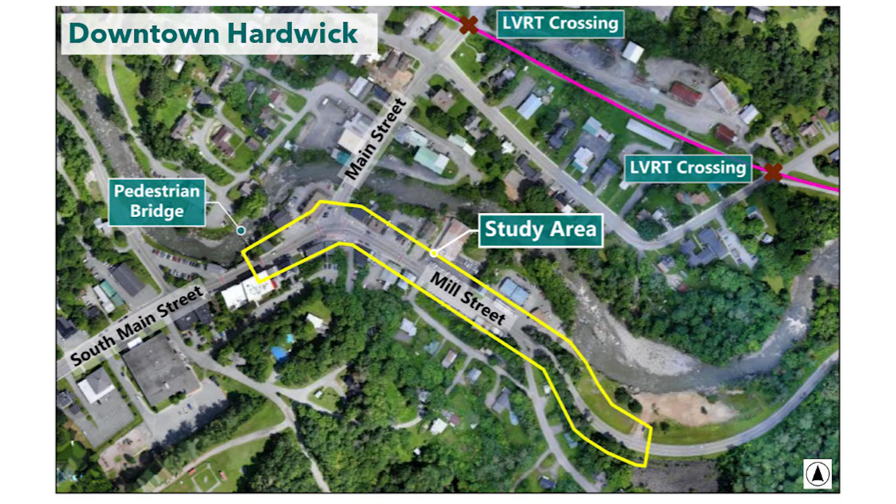Just a little overview here for folks who are maybe new to the project and weren't with us the last time. This is the focal area of the study—at a 30,000 foot level, we're looking at South Main Street and Mill Street, essentially from where the pedestrian bridge connects into the system, all the way over to the town parcel at the gateway into downtown Hardwick to the east on Mill Street.

We did do a site walk the last time we were out here to really assess the existing condition and help us understand things in more detail. We had a lot of data and information collected as part of that existing conditions review, but it was really helpful to ground-truth things. We identified a number of issues, including some disrepair in the sidewalk system as it is today, and when focusing on pedestrians and enhancing their experience along this corridor, we're thinking about making sure folks are comfortable and our sidewalks are accessible.

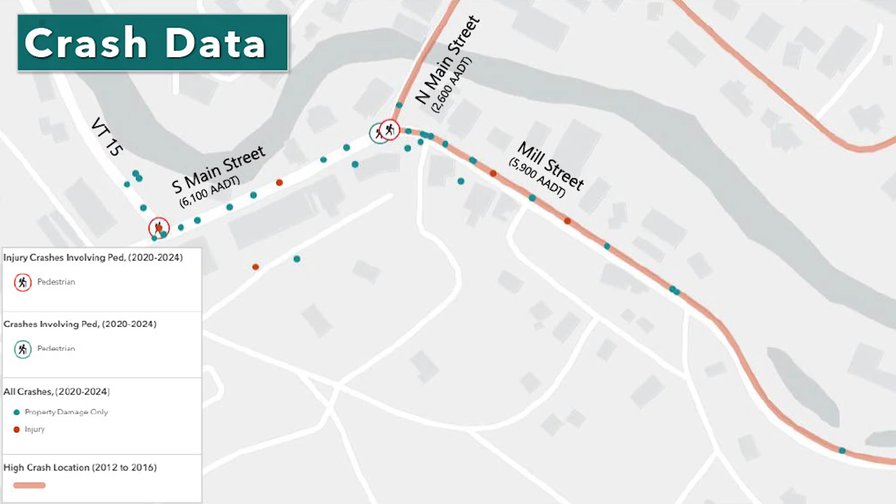Mill Street is considered a high crash location segment, though some of that analysis is a bit outdated, hinged on older crash data. When we dig into the more recent data, you're seeing 2020 to 2024 crashes here, and we do have some locations with pedestrian crashes and vehicular crashes resulting in injury. We're using that information to inform and dig into those crash reports a bit deeper to understand what traffic movements or conflicts we should be paying attention to as we look at alternatives.

All right, so the project purpose and need—this really helps us, especially in the next phase. It's defining what is compelling this work, and helps us justify the funding going forward to do this good work. It's our way of laying that groundwork, and it also lets us evaluate different options on the table for making improvements, making sure we're meeting the need we've identified for the project.

The purpose of the study as we've defined it is to create a safe, comfortable environment in the village core and establish a clear transition to the multimodal core area, improve connectivity of the pedestrian network to support access to community destinations, including businesses and recreational resources, and improve multimodal transportation connectivity and infrastructure.

Some of the needs compelling this study highlight deficiencies going forward: a lack of an effective transition zone from high-speed rural highway to village center, a non-continuous pedestrian network, and insufficient capacity to handle increased multimodal activity, particularly from the LVRT but also other recreational uses.

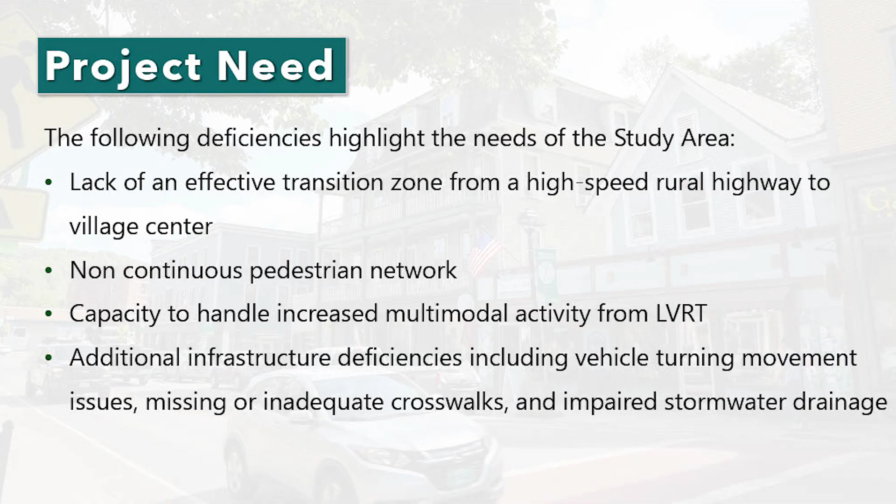Additional infrastructure deficiencies include vehicle turning movement issues, missing or inadequate crosswalks, and impaired stormwater drainage. This isn't meant to be fully exhaustive, but it helps define the needs that compel moving the project forward and making sure these improvements happen.

Conceptual alternatives: over the next several slides we'll step through the alternatives we're pulling forward. One thing to keep in mind is that the alternatives build on each other. There are three alternatives, and I like to think of it as a menu of options, where each alternative builds on the last.

The first alternative has some options on the menu that we could select from, and the second alternative adds to that menu of options. There are conversations around different trade-offs for different menu items, and we can talk through those trade-offs and the needs we were trying to address with each option.

We'll step through this, so bear with me—it's a lot to take in. We can pause and open it up to questions if folks have clarifying questions as we go, and then have more of a dialogue afterward.

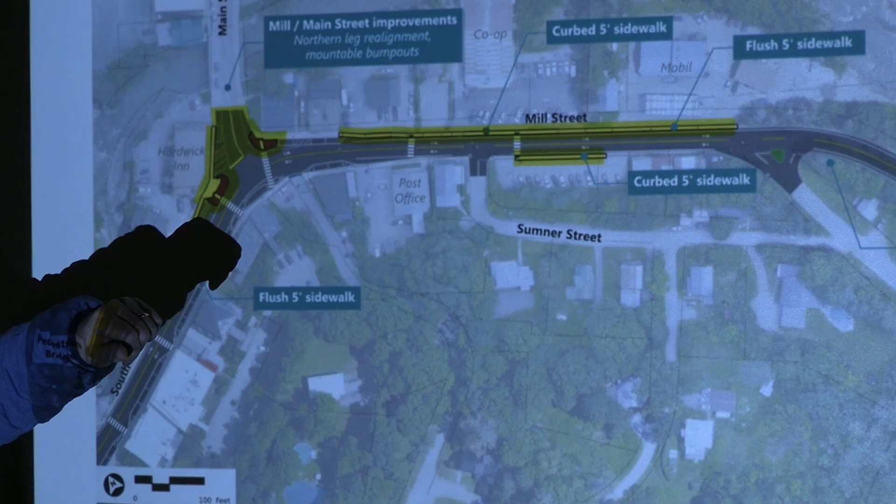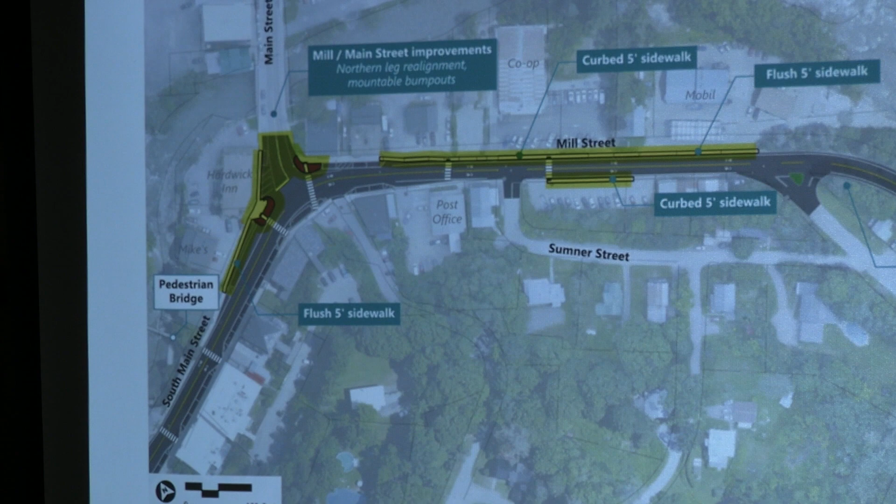It contemplates a continuous sidewalk along the north side of Mill Street, along with improvements to the existing infrastructure, including the sidewalk segment in front of the public parking on Mill Street's south side. We also contemplate some vegetation clearing to help with sightline challenges around Glenside Avenue.

And again, thinking through a flush sidewalk in front of the gas station here, really trying to define that space for pedestrians.

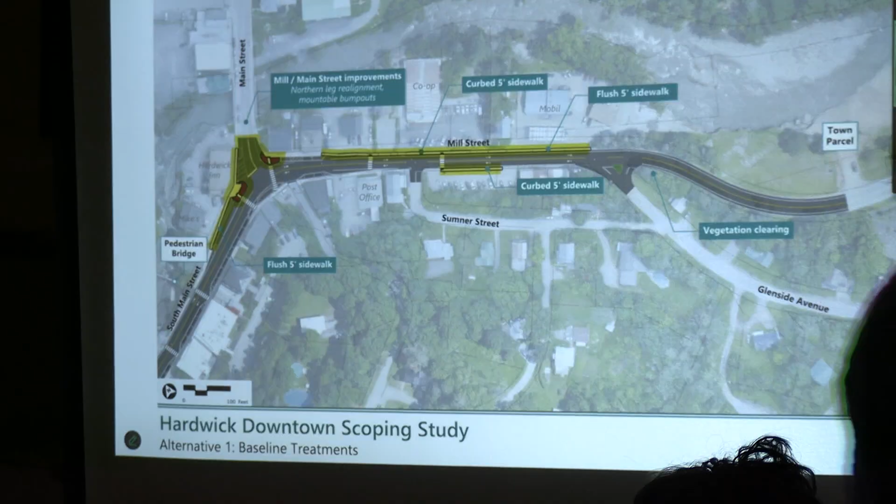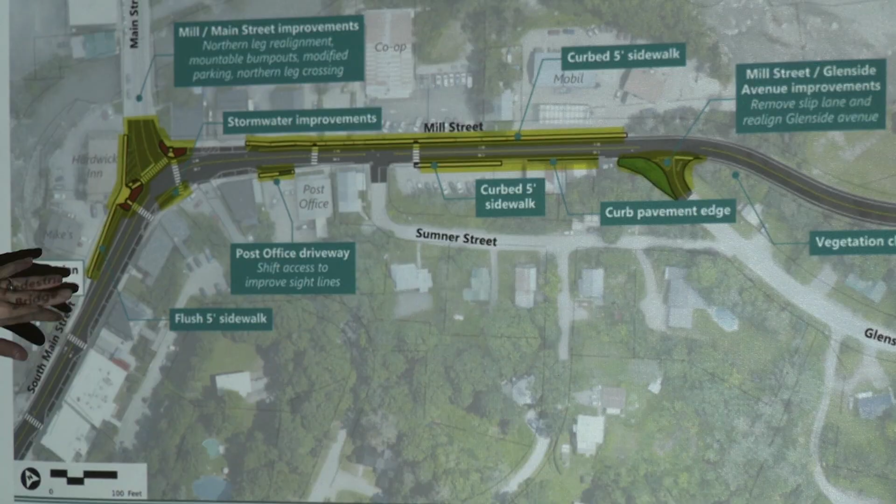At a high level for Alternative 2—again a zoomed-out view, we'll zoom in more—many of the same options from the first alternative appear here: the continuous sidewalk along the north side, sidewalk improvements along South Main Street, and bulb-outs at the intersection of Main Street and Mill Street. This brings in the missing crossing and enhances those bulb-outs so people slow down and take turns intentionally, introducing better pedestrian connectivity.

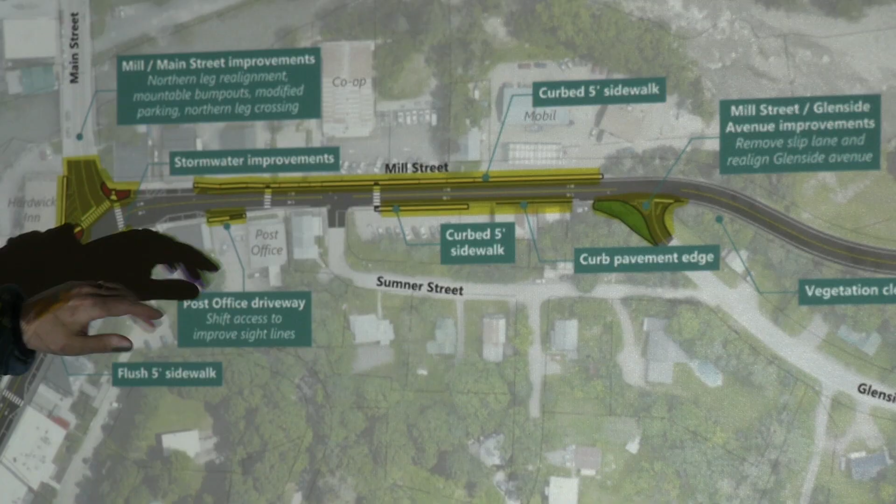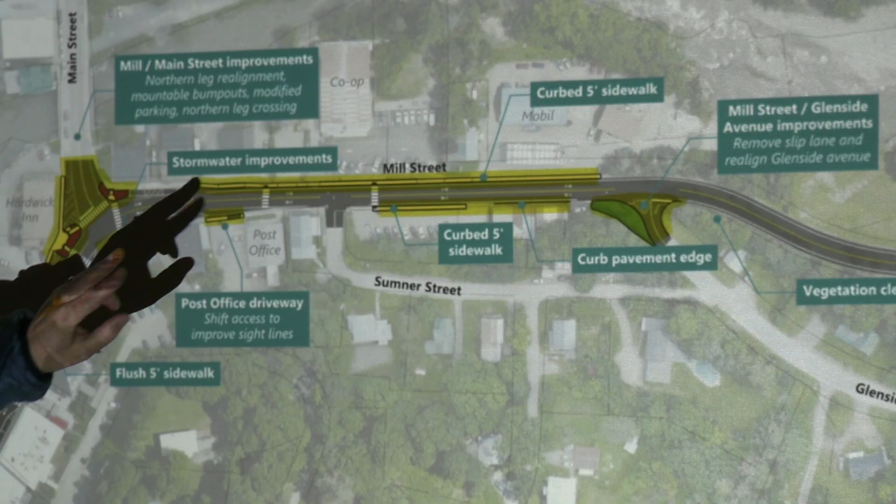This option also contemplates changes on the south side, including swapping the location of the post office driveway. That's one thing we heard—there are challenges around that sight line—so we're thinking about defining the driveway a bit differently, bringing in curbing elements to define that space sooner as a more constrained area where people need to slow down.

It also contemplates removing the slip lane and realigning Glenside Avenue into more of a T intersection—rethinking that geometry—coupled with vegetation clearing to help improve the sight line.

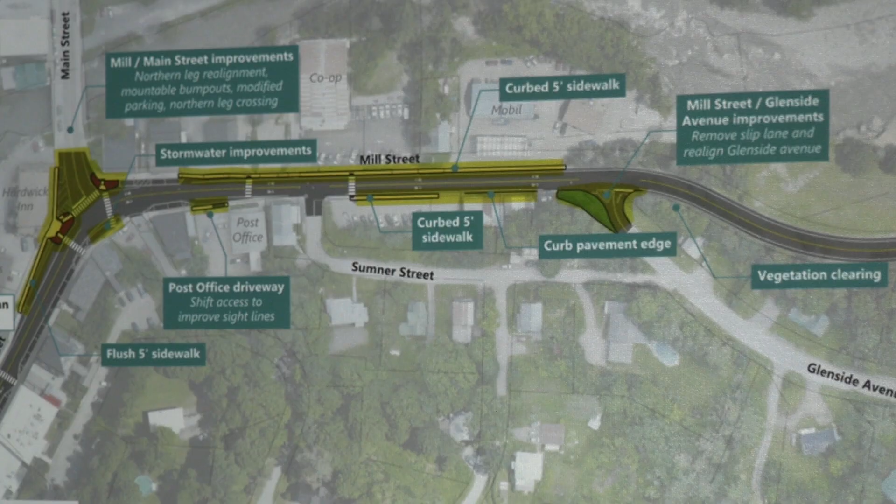So what we're contemplating at Glenside Avenue in this alternative is to remove the slip lane, remove the Y geometry at that intersection, and tee it up so it comes in more at a right angle to Mill Street, coupling that with some vegetation clearing to gain a little more in terms of the sight line.

We'll zoom way in and look at these in more detail, but this is the high level view so you can see some of the elements we're adding to the menu of options here.

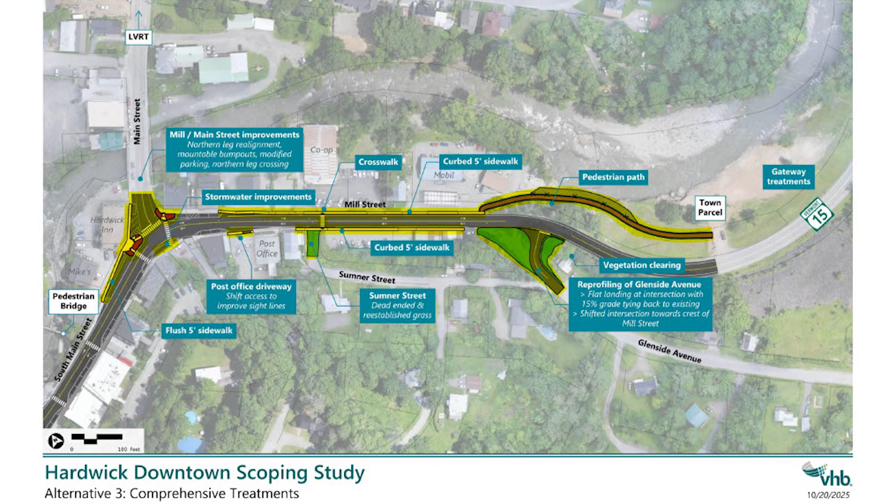So alternative 3 contemplates many of the same elements we saw in alternative 2, but there are a couple of new things coming into the fold. This option is thinking about creating not only pedestrian connectivity on the north side of Mill Street, but also on the south side.

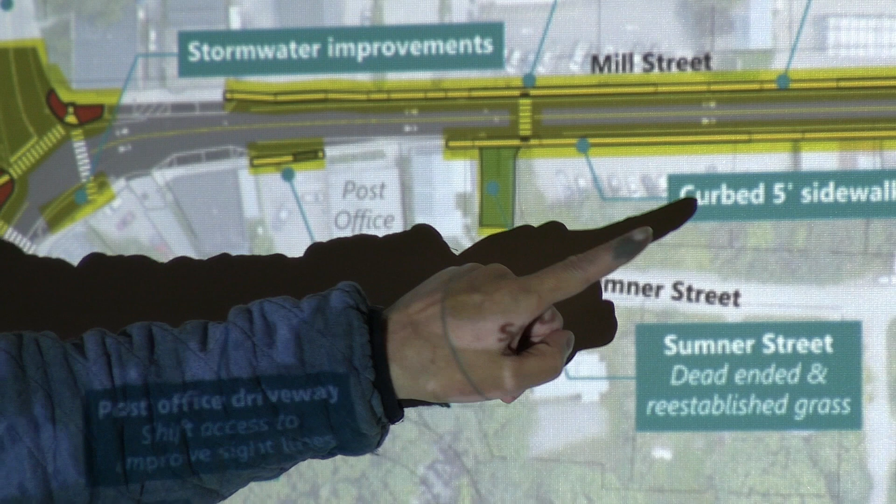There are some real trade-offs on this one. It contemplates dead-ending Sumner Street and reestablishing the hillside so we can have a continuous sidewalk along the south side of Mill Street. That's based on the fact that Sumner Street is very steep, and there's really not a way for us to flatten out at the bottom of that hill and slope to have a safe sidewalk along that stretch without making Sumner even steeper coming out of that intersection.

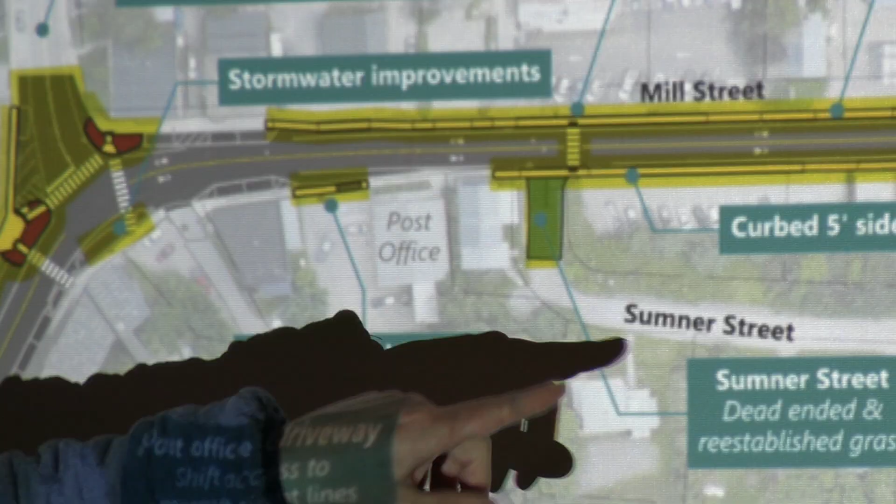This is an idea that bubbled up as part of the local concerns meeting, and we wanted to pull it forward and think about what that could look like.

We were thinking through a connected sidewalk all the way through in front of the public parking, really defining those driveways, and then thinking through a change in where the Glenside Avenue intersection comes in and meets Mill Street.

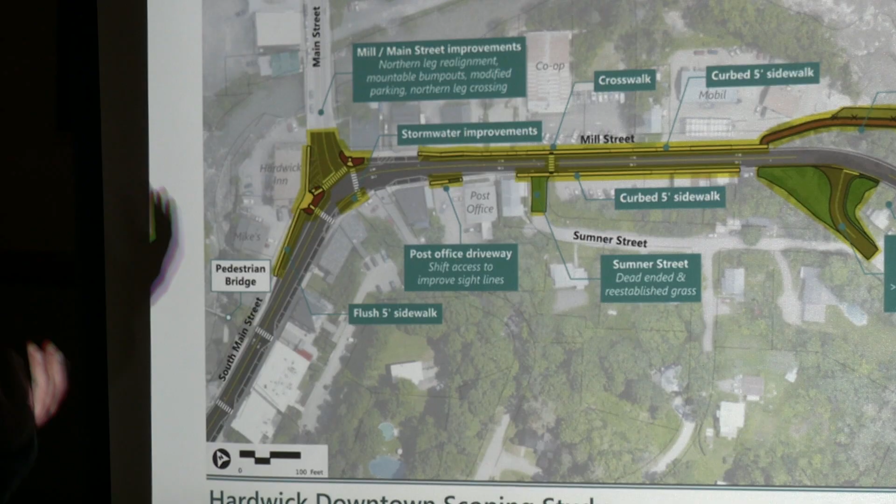So moving the intersection to essentially the crest of the hill that you come over as you come into town. What that enables us to do is really have that sight line, so when you pull up to the intersection you'll be able to see traffic coming around the curve and into town. That's a big change in terms of geometry and certainly in terms of impacts to the parcel on the corner there.

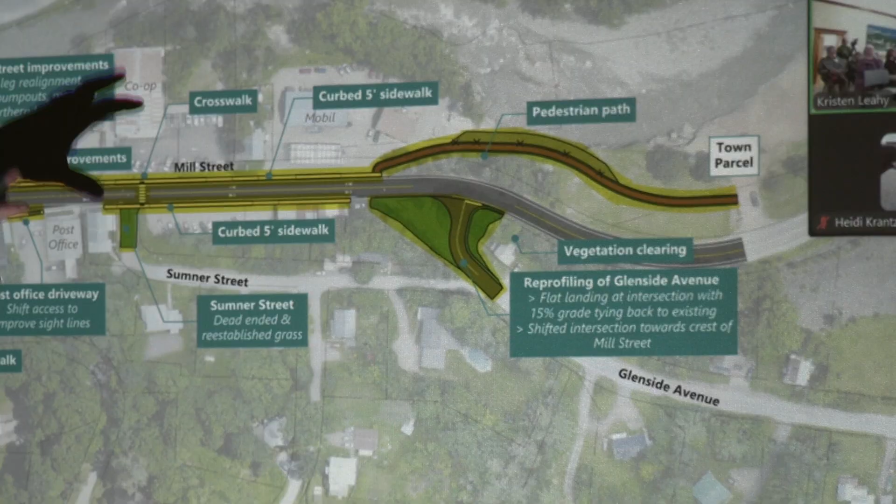We'll talk a little more in detail about that one. It also contemplates a pedestrian path into the town parcel to the east here. There are some ideas about what that ultimately becomes, but if we're thinking forward to it becoming more of a green space, a park space folks can access, we're thinking through creating connectivity to that space.

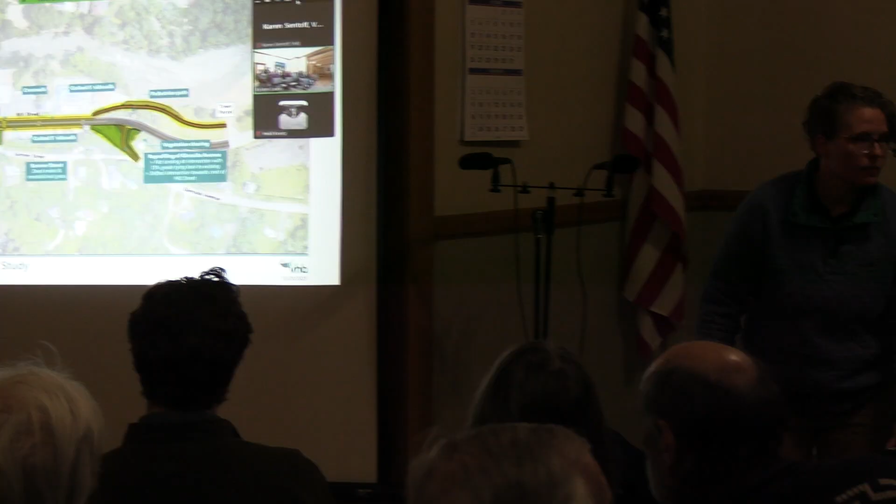Did you mention the gateway treatment? Oh, absolutely. I did gloss over those, but yes.

With each one of these, we're bringing forward and thinking through some gateway treatments. Mostly at this juncture, some bigger gateway signage, welcome to Hardwick, that sort of thing. We tossed around the idea of some other elements we could introduce, but it's a little tricky with where the town highway, Class 1 town highway starts and where the state highway ends.

In terms of other treatments, we weren't really pulling on anything specific, but certainly if folks have thoughts about that and want to dig in further, we can.

All right, so zooming in on alternative 1 in a little more detail here. This is showing, in a slightly different orientation, South Main Street here. So what we're looking at, and I'll jump back over here...

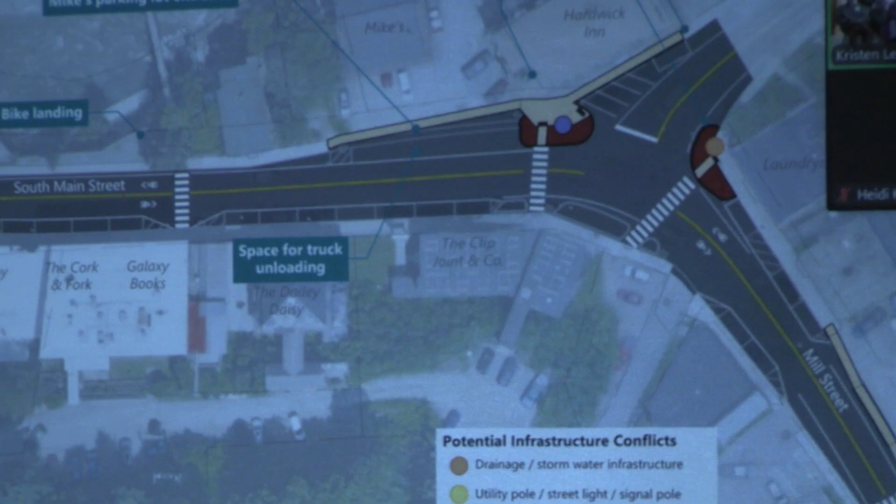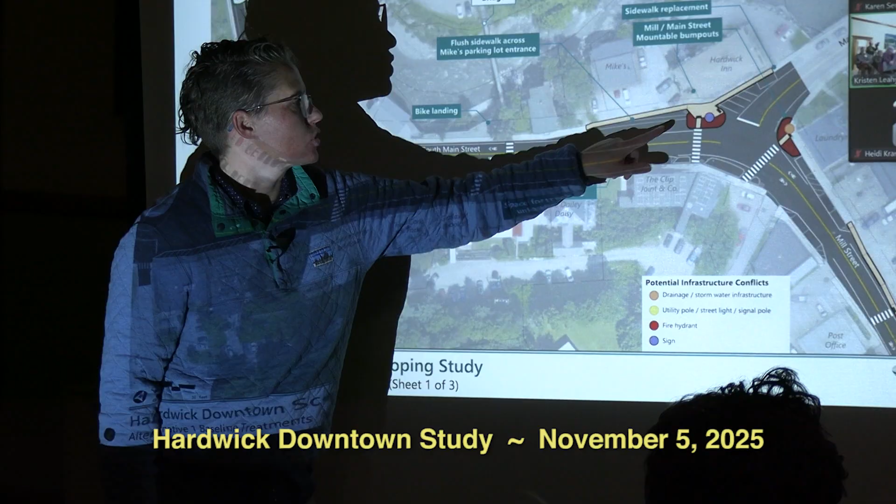I apologize to folks I'm around the corner on, but on South Main Street, we're really enhancing the definition of this sidewalk through here, which would be flush, so we'd still be able to have vehicles coming in and out of Mike's, but defining that space well so folks know where they should be, improving some of the challenging hazards and elements in that space, and helping to smooth that out. We would maintain this shoulder space currently used as an informal truck loading and unloading area, so we want to retain that, but again help define the space.

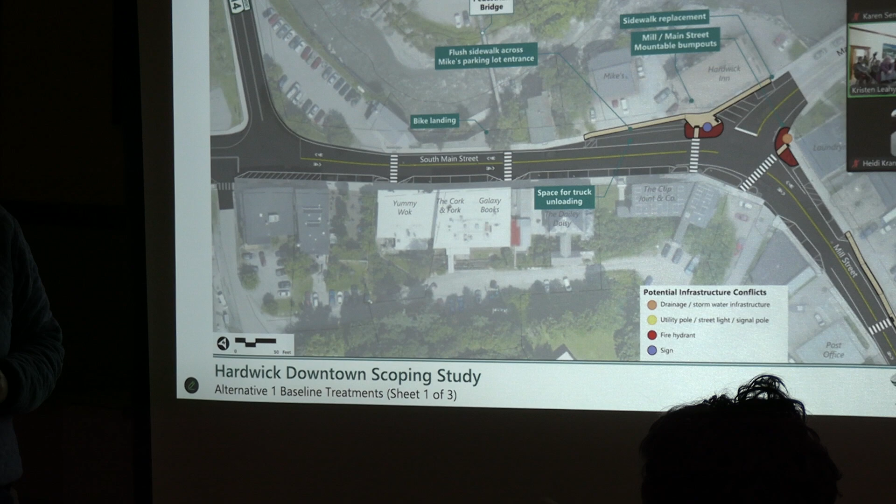This also contemplates bike landing areas, either at the entryway to the pedestrian bridge, or we had talked about at the Peace Park.

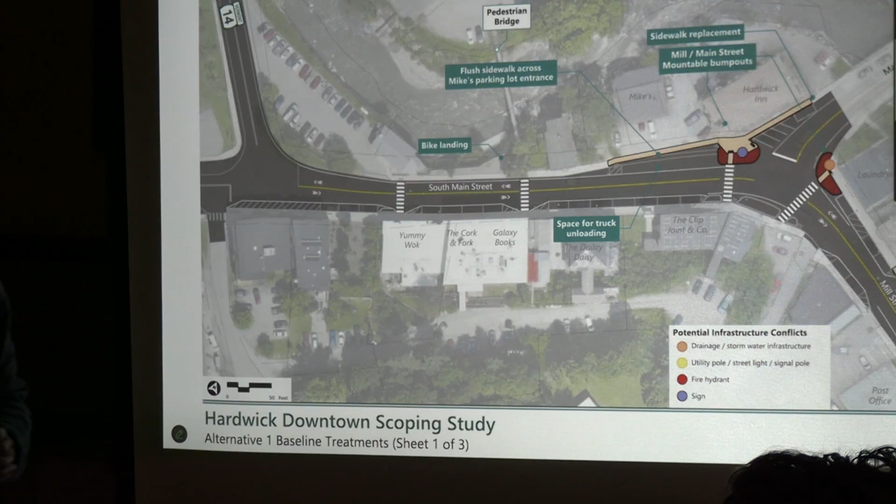This also contemplates some bulb outs and some mountable treatments at the corners, again really thinking about getting folks to slow down and turn intentionally, but still having those mountable pieces so we can get a bigger vehicle through there, no problem, they'll track over that mountable curb. In this option we don't have that crossing, so that's something to think about as a differentiator as we step into the next alternative.

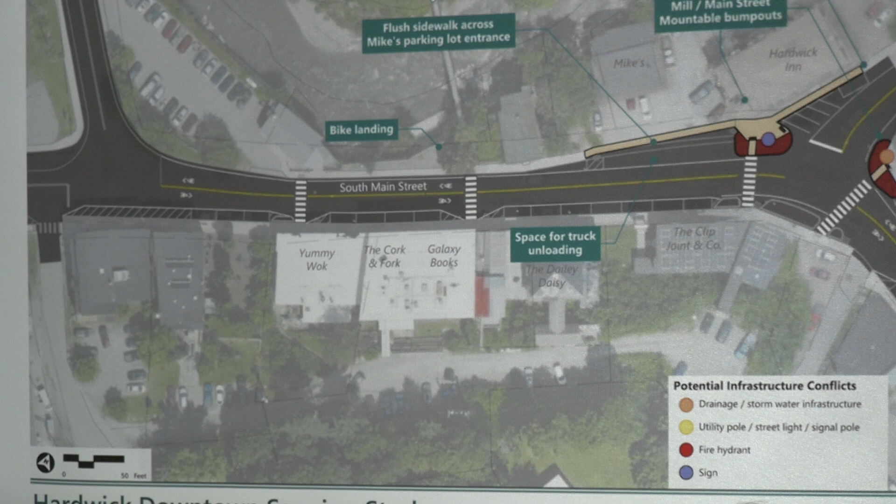What am I missing on this one? I think that's all the components. Oh, and then just a couple of impacts in terms of drainage on this one. There's a structure here we would have to move, and some sign impacts in terms of moving existing signage. And also retaining the same parking in front of the inn.

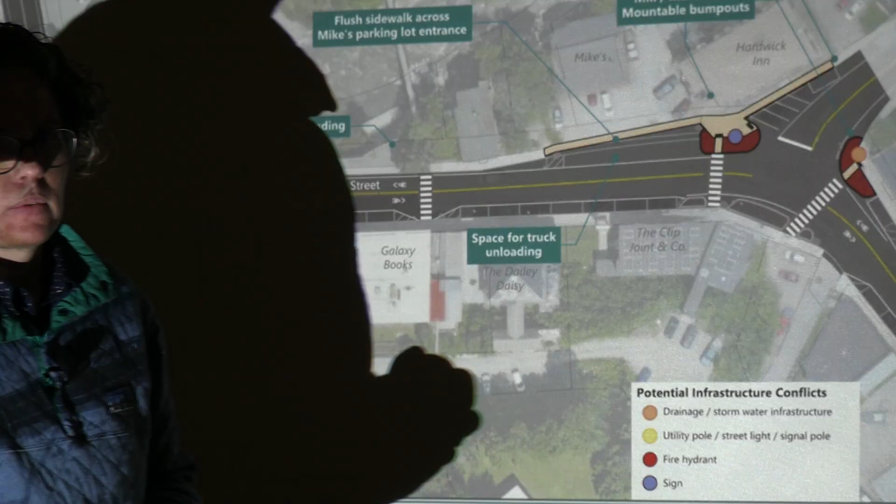Yes, with this one we are retaining sort of the same parking configuration that's there today in front of the inn, but losing one space in front of the laundromat.

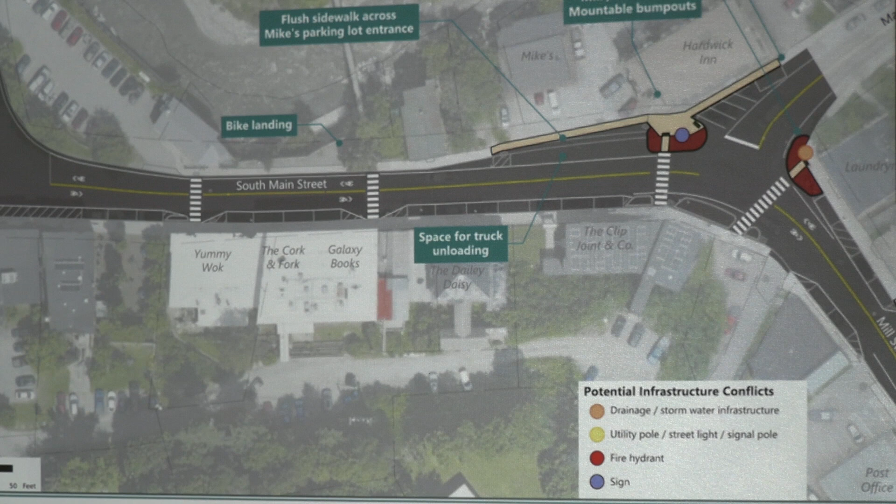So this would retain the same crossing location, and I think we're retaining the same parking layout as before. It would just have a mountable curb closer to that first parking space. As for the question about Hardwick Inn, there's no crosswalk in this one going across from left to right, so that 20-foot rule only applies when you're approaching a crosswalk. But there will be a crosswalk there if we go to the other option.

On this next segment, looking more focused on Mill Street, just a couple of things to call out. Through the north side, a continuous sidewalk here - we are looking to define some of these driveways, so it will be a raised sidewalk with driveway aprons along that length.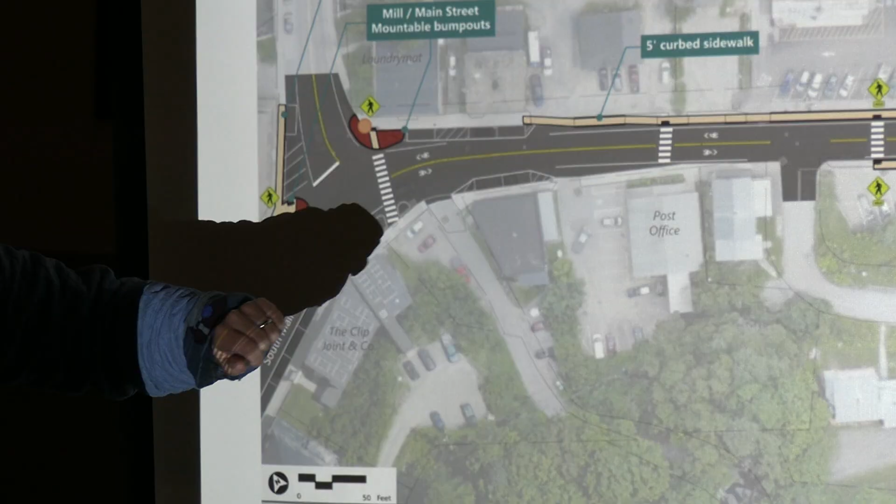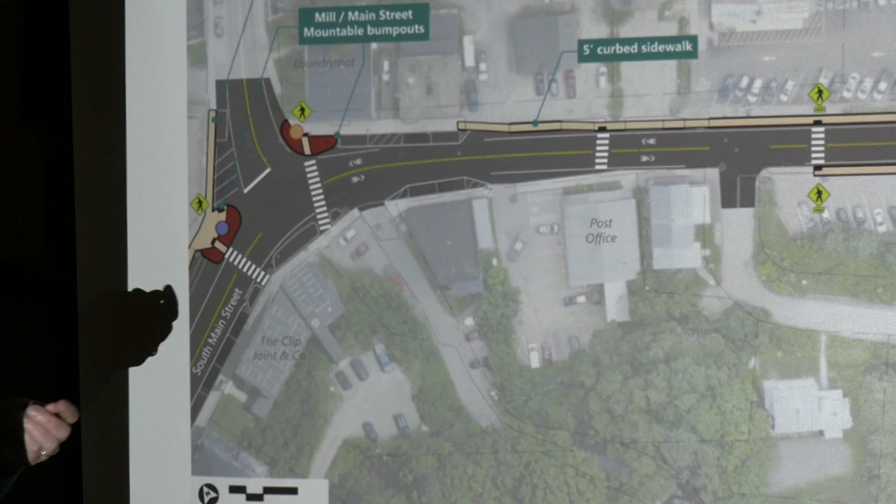It also contemplates some enhancements to the existing crossing that's missing some elements, including the signage. So enhancing the landings and the signage associated with that crossing, as well as redoing the sidewalk on the south side through the public parking to create that connection to the north side.

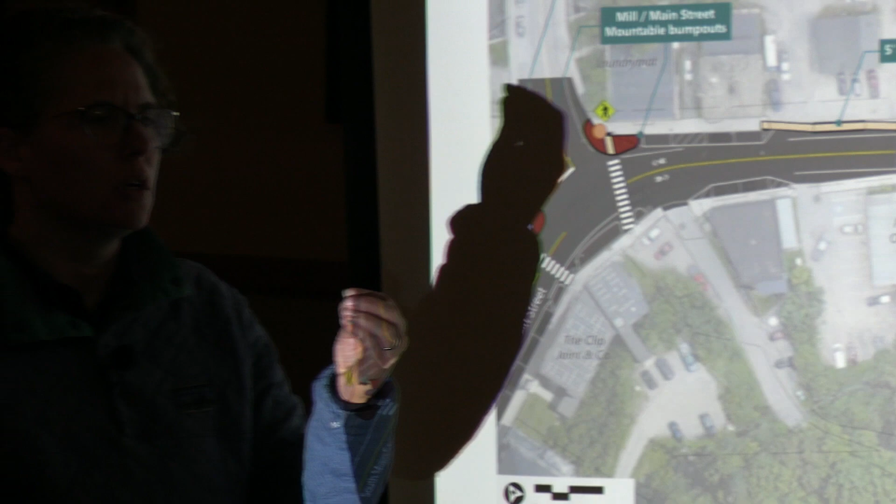We're also showing sharrows throughout. I know this was a recommendation pulled forward from the Loop study that was done - I think they were more focused on connectivity to the LVRT and some low-hanging fruit improvements, so we carried those forward with the sharrows. Just recognizing this is a really constrained environment, we really don't have the space for a defined bike lane, so in recognition of that and the traffic calming we're trying to achieve, the sharrows felt like a good way to go for making that awareness that bikes could be using the space as well.

Where's the break in the sidewalk at Jiffy Mart? So in this one, it would be flush through the entire stretch - we'd be defining that space and having a concrete sidewalk, but it would be flush with the driveway and access around it.

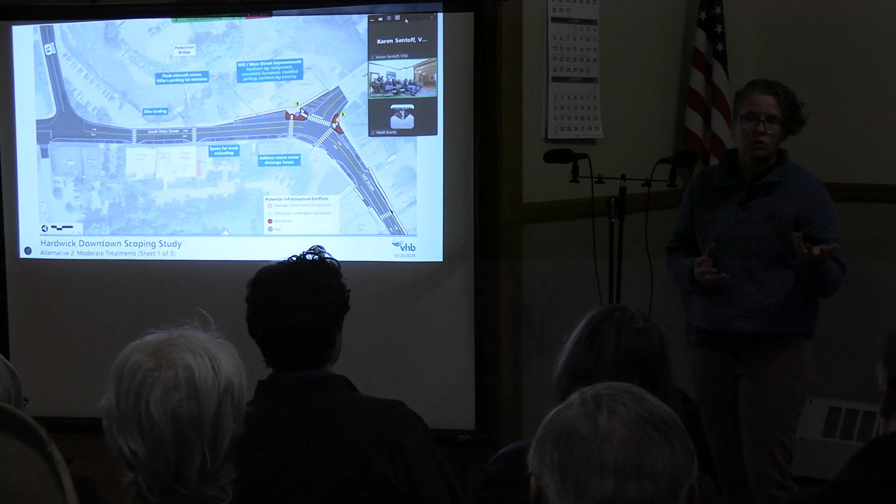In this option, we are adding the crosswalk in front of the inn and sort of that connection that's missing on the north side of the intersection. In this one, we are, again, ramping up to the sidewalk level from that parking, but we would lose a parking space in this alternative to sort of enable that space that we need distance from the crosswalk. For that parking, the bulb outs would be mountable where you see sort of the red pattern so that we still can move trucks through the space.

In this option, we just want to sort of highlight that we would be addressing some of the stormwater drainage issues on the existing bulb outs on the other side of the street. There are just a few ideas that we've been contemplating around some of the improvements there.

And then moving along Mill Street here, a couple of things to highlight. So on the north side, again, really thinking through that continuous sidewalk, very similar to what we saw on the previous alternative, enhancing that crossing in front of the market between the public parking and the market, and establishing that curbed sidewalk on the south side to create that connectivity.

In this one, we are contemplating that shift, sort of flip-flopping the driveway access for the post office and giving them a little more room from the parking to sort of be able to see that visibility in that sight line, and reestablishing the sidewalk on the other side.

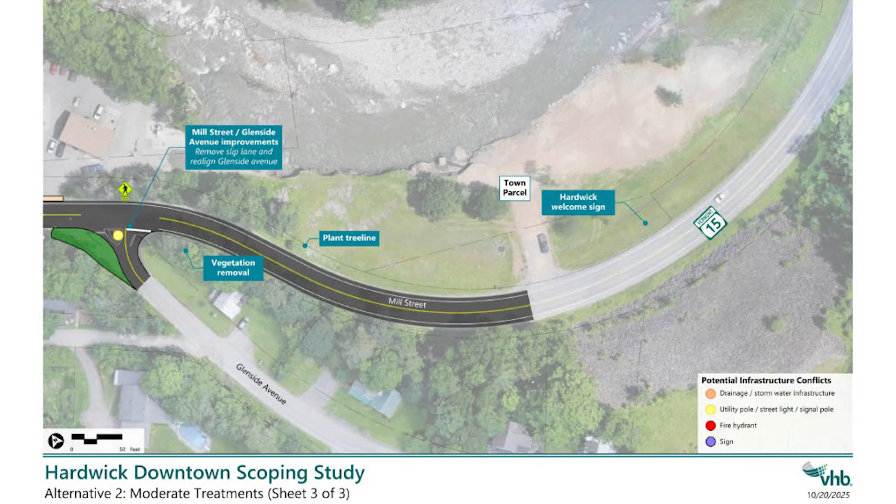Again, on this one, a little bit further east and sort of in that transition zone from the highway, really thinking about the welcome sign, planting the tree line, again really trying to get folks to recognize that they're entering a place where they should be slowing down and thinking about what they're doing and not just driving a 2-lane rural highway. And then again, we touched on the vegetation removal and Glenside Avenue intersection improvements.

Zooming way in on the Mill Street, Main Street intersection here. Just a couple of things to highlight, again, in terms of some of those trade-offs or impacts of this one.

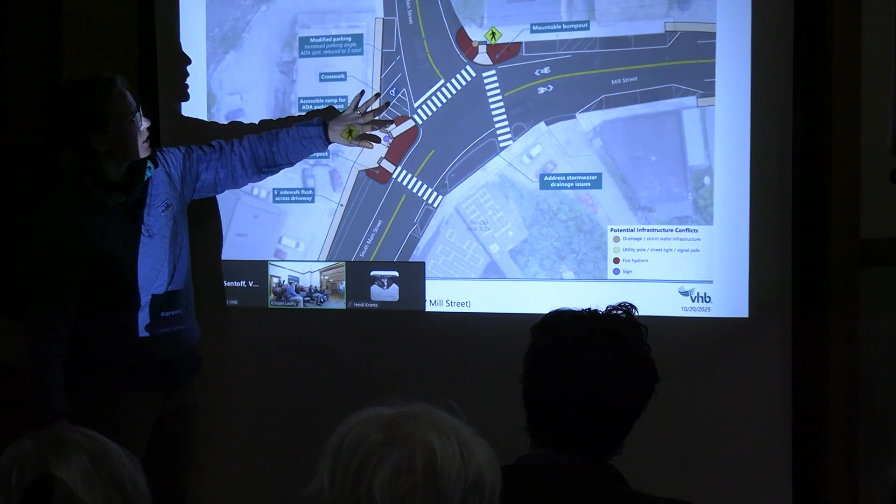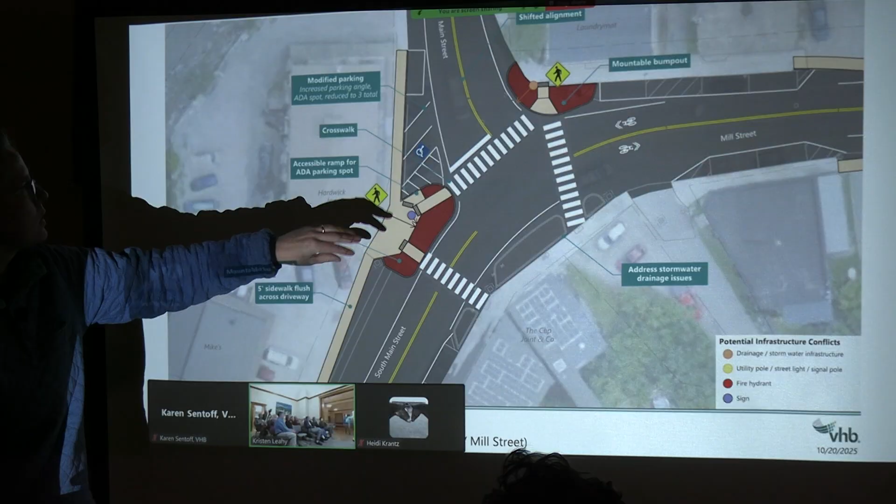So again, we'd be modifying the angle of this parking to accommodate 3 spaces. I think today there's 4. So we're losing a space, but we're gaining an accessible space in this scenario and ramping up to be able to serve that space and get folks to sidewalk level. Again, the sort of mountable bulb outs, but with this one, have that crossing to serve that desire line for folks to be crossing on the north side of the intersection. And again, in this one, moving some signs, moving some drainage to accommodate that configuration.

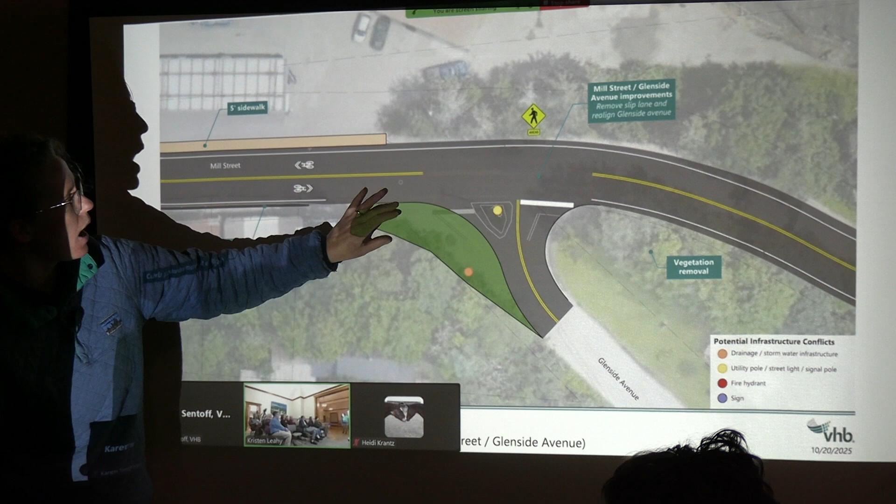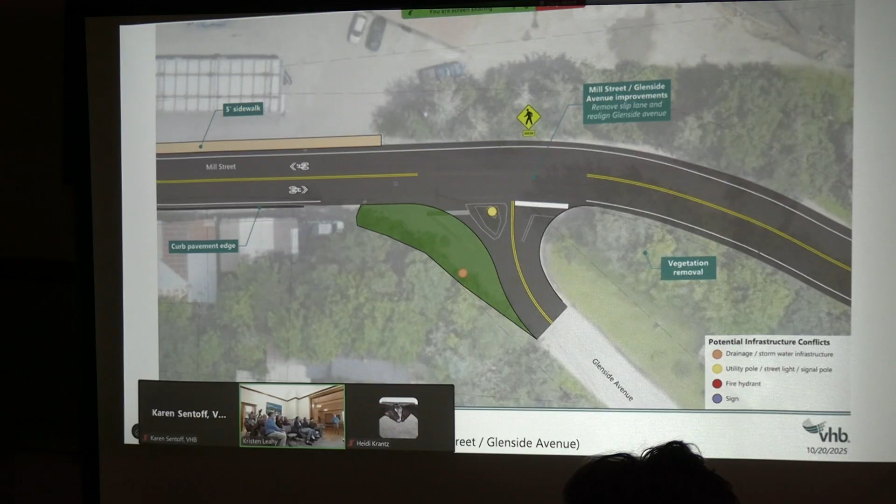Zooming way in on the Glenside Avenue intersection, the current edge of pavement is right along the line I'm making with my finger. So we'd be taking away this part, reestablishing some pavement through here. There are implications in terms of a big utility pole in that little triangle, so we'd be moving some utilities, but really teeing in this intersection and changing the geometry, removing some vegetation on the hillside to help enable a little more visibility there. I think that's it for that one.

All right, stepping through alternative 3, think about how we're building on some additional menu options that we can be thinking about pulling forward into a preferred alternative.

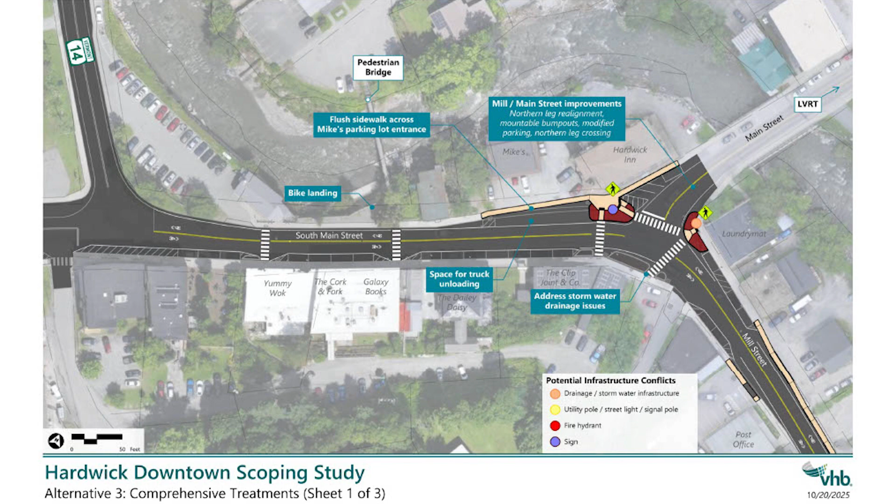Zooming in on South Main Street, many of the same pieces that we saw in the previous alternative apply to this segment. So a lot of similarities here, not a lot of differentiators in terms of either the elements or the impacts.

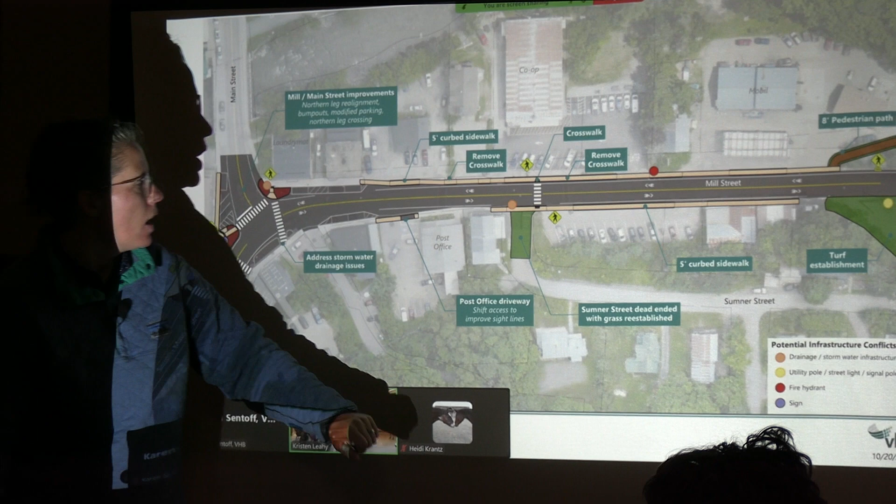Shifting to Mill Street, this is where the menu of options grows. With this one, we're really thinking through creating that continuous sidewalk on the south side. That means dead-ending Sumner Street, reestablishing the hillside where that connection is today, and being able to carry this sidewalk all the way through, past the post office and this house beyond, to the public parking.

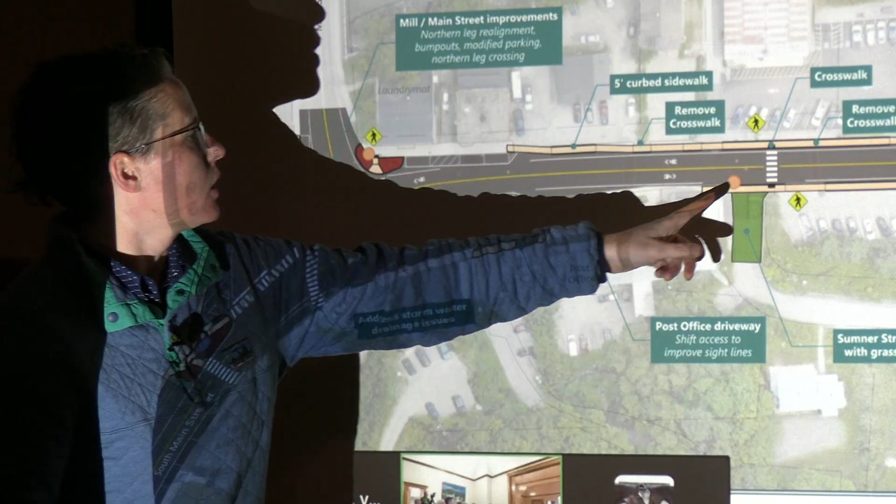This is also contemplating, as you can see better zoomed in, consolidating the two crosswalks into one. So removing the crosswalk closer to the post office and removing the crosswalk that currently has pavement markings but no signage at the market, and consolidating them into one that would serve both purposes, just thinking through what that would look like.

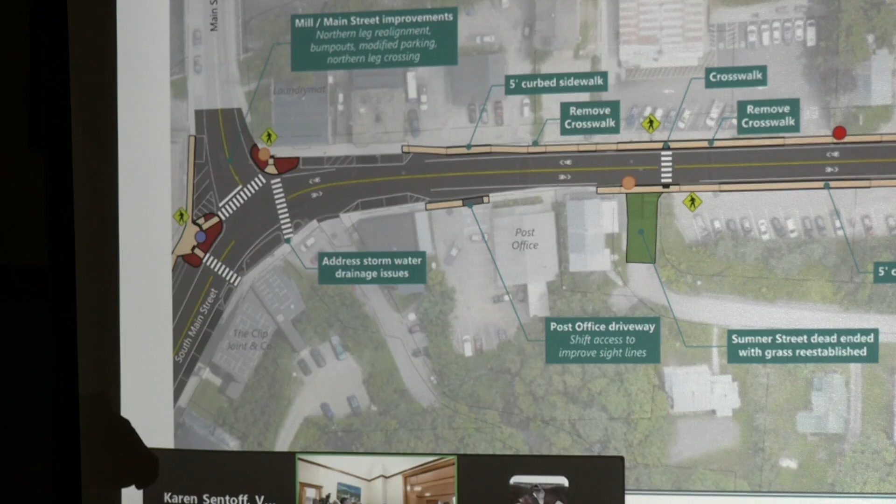Could you extend that parking lot into that area, where you eliminate the end of that street?

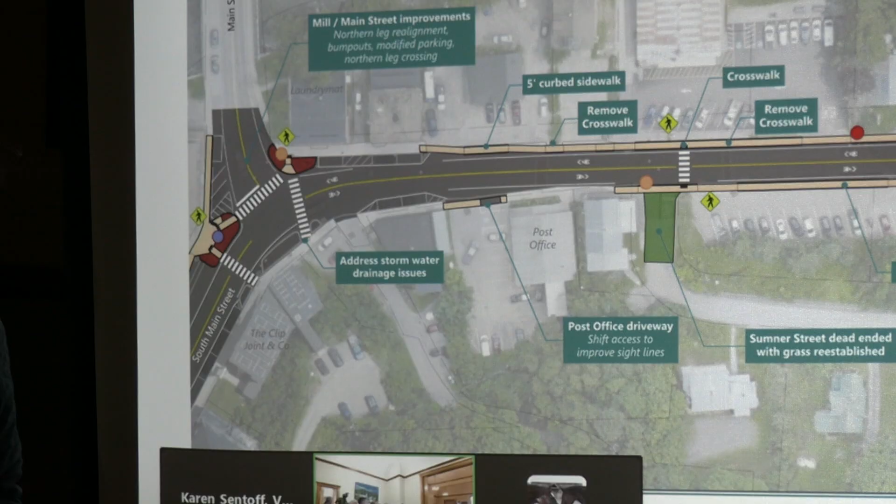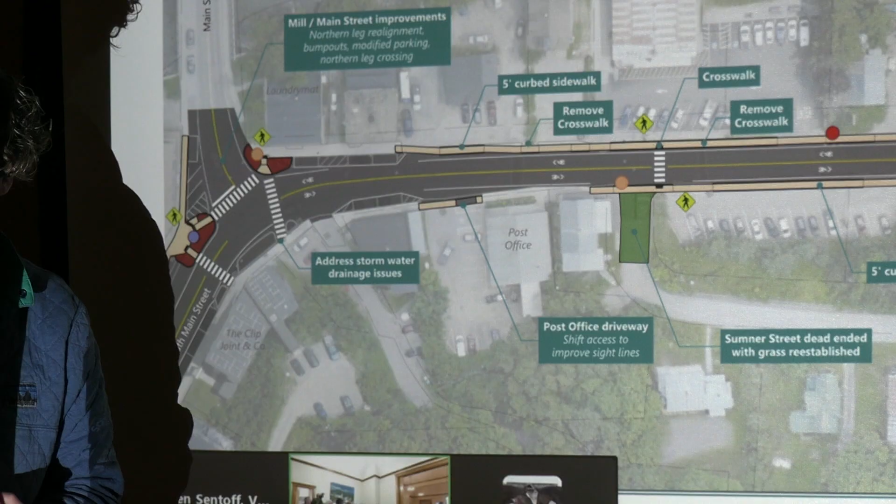That is a great question. Because you're already eliminating, like, the laundromat's one parking space in front. So it would require, if you think about what that looks like, a pretty significant retaining wall along the backside of that parking to create that space. But it's a great idea to add to the number of available spaces, especially in light of maybe losing a space or two further down. That was ledge there, they had to blast for it to put in that parking lot and the wall, so it's not a simple fix. Yeah, it may be ledge underneath. It'd be perfect though, since we're taking spots out and need spots there. Not just at the laundromat, that side of town has no parking in general. We're taking a minimum of two spots, and we didn't dig in too deeply, so it's helpful to understand that historic knowledge of the ledge being there.

One other problem is that I'm a resident on the corner of Sumner and Holton Hill, and you can't go up the hill in the wintertime. Our town crew does great work plowing, but you can't go up the hill from my driveway half the time, only downhill. And the entry from Sumner to Glenside, if you've experienced that in the wintertime, you can't make that turn the other way easily. Coming out of my driveway becomes an impossibility. I'm the last house on the right on Sumner Street, and I cannot come out of my driveway and make a right-hand turn toward Glenside. It's even worse coming from Glenside onto Sumner. So I'd have to go up Holton Hill and come down by the elementary school, which makes more of a problem. You also have the issue of the town crews plowing Sumner Street, so now you've blocked it off and they've got to back up the plow. Where do you put the snow? Yeah, I definitely hear you on that. I do think this would likely have to be coupled with some sort of turnaround at the top of the hill.

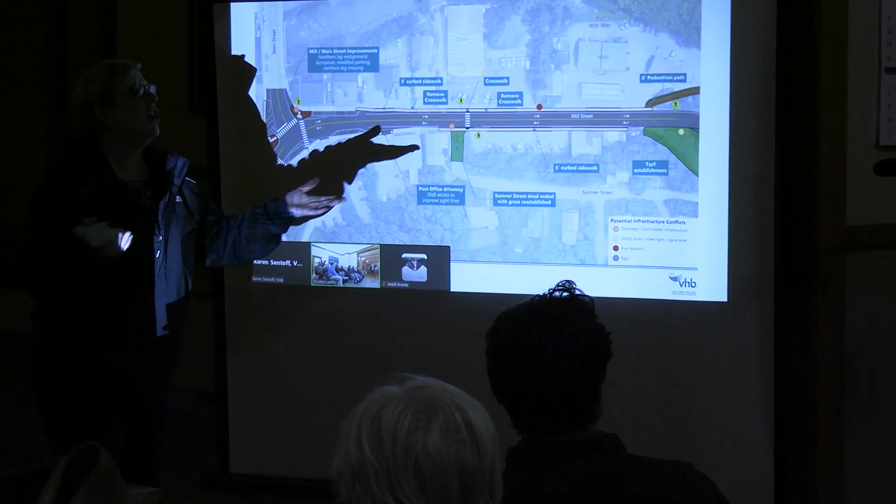Right? So these parking spaces - you have all these parking spaces that could be created. So this would be a road with parking? Yes, that's - I was just thinking that's a much easier way, it makes it easier to get out on the main road. But I know it doesn't line up with their solution to the Mill Street problem, because that's really all that they're addressing today, correct? Yeah, it is. And I know it's a little beyond the scope of this effort.

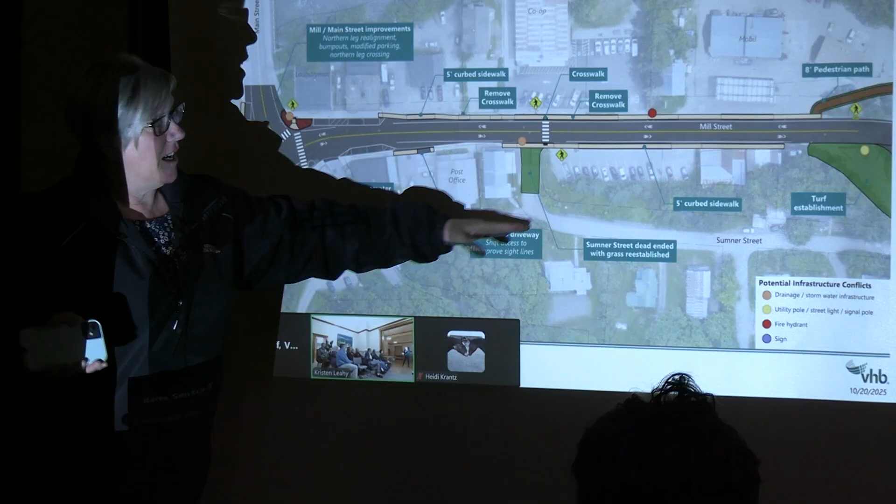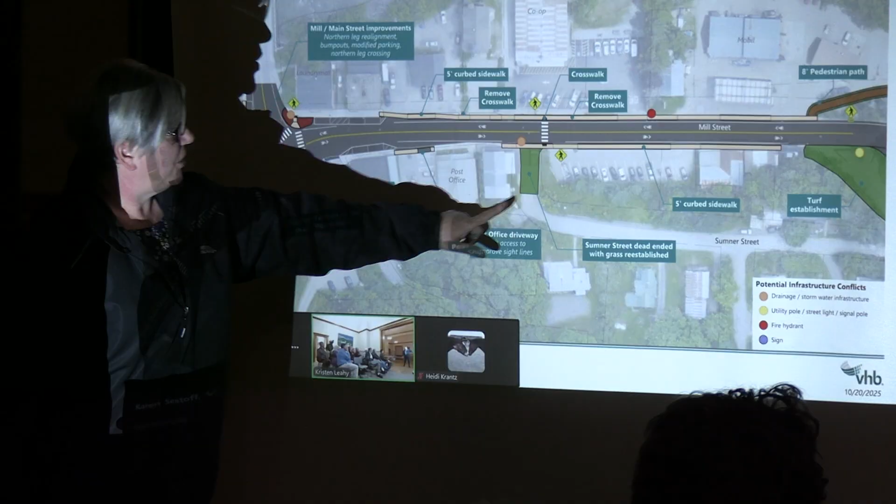But it might be something the town may want to consider at a later time. Again, I don't need this, I don't have any reason for this. If I can pass it through the engineering department at the post office and make it happen, I'm willing to do that. But it's not going to be at the expense of the post office - it's going to be at the expense of the town. But you're creating all that parking space and an access point for Sumner Street. You can create this wall that you're talking about here, which I suggested putting in steps here. And even with the post office, you can put in steps here to get down to the post office. So this is useless land. It would also, for your present parking lot, you get jammed up people coming in and out - with the parking, it would make it circular.

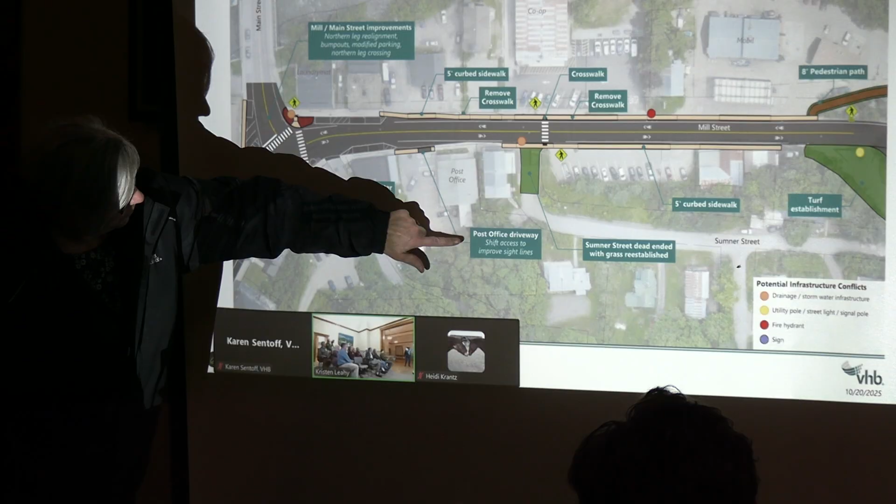And the only way this is going to happen too is if also all the parking with the engineering department at the post office - who I said I'd be willing to change it - I can change the lot, I can change the parking spots here and make them horizontal this way. And then everybody would be parking this way, and our trucks could still come in. But this can't happen without the engineering approval, which I'm pretty sure I can get passed based on the safety issues that we have.

But that was my proposal, and I just wanted to throw that out there for those of you who weren't here. Thank you for bringing that back to the fore.

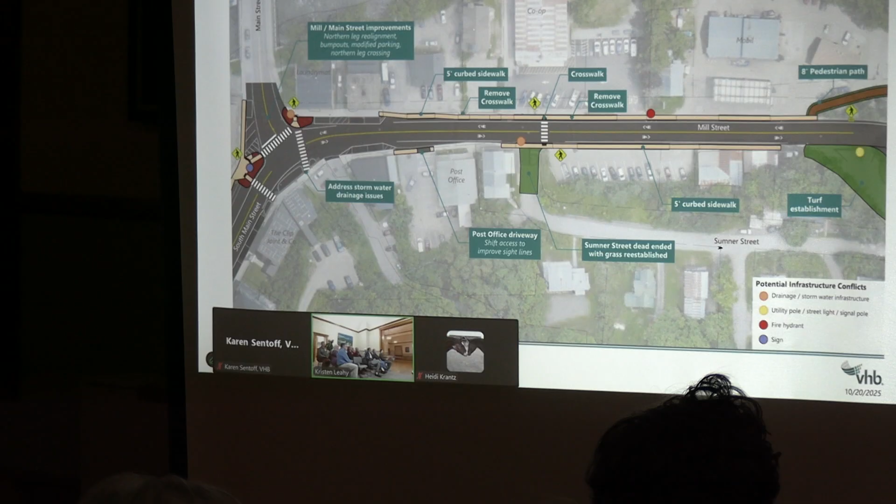I think one of the things we stopped at is whether closing Sumner Street is on the table. Having that trade-off of potentially looping through and creating that connectivity is something we want to contemplate, but we didn't want to dig too deeply if the community felt it wasn't an option to carry forward. So if it is, we can dig deeper into the preferred alternative and what it would entail to move that piece forward.

Yeah, go ahead in the back. Great idea, but the only issue is bringing it down into that side street that dumps back onto Main, that corner there. That's a terrible corner to pull out of because of traffic coming around that corner. Granted, you're trying to slow it down, but that's a terrible intersection, and with a new building there it gets even worse. The sight lines are bad, and you probably want to move the crosswalk again.

You'll need a street light. I think once you add the other two solutions with the bump outs, it might be better. My carriers drive down there every day to and from, and I wouldn't have them go down there if they didn't have visibility, because I have to test that myself. I hear what you're saying, but it's still a better alternative than what we're dealing with already. It isn't going to create a perfect solution, it's going to give you kind of the same visibility, just in a different location.

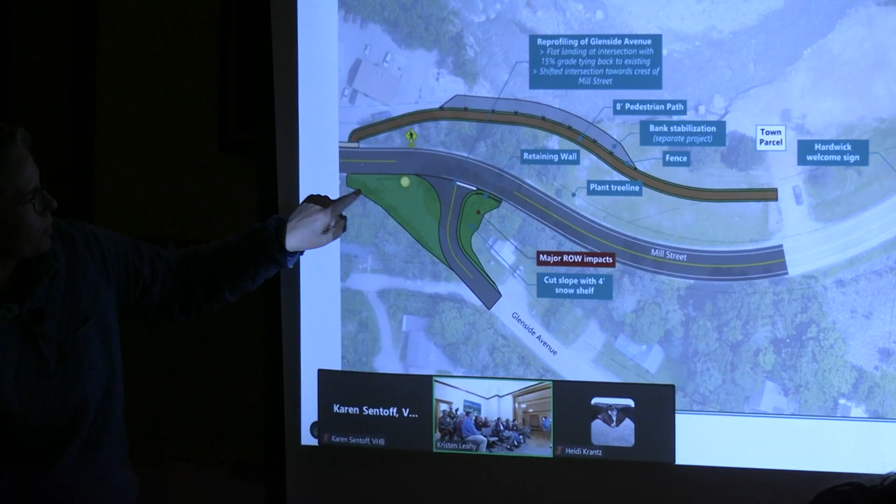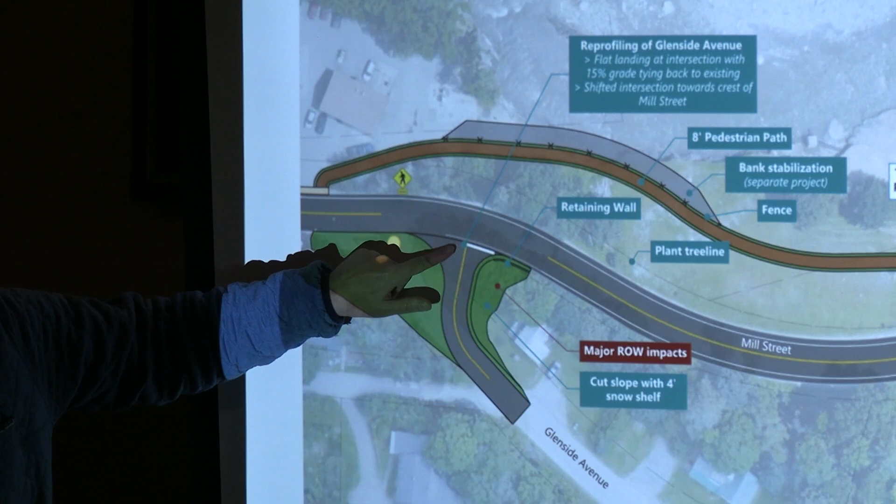That would stay, and then we'd reestablish turf through here, potentially a sidewalk connection, now that we're hearing that. And then really reconfiguring this and creating more of a flat landing at the intersection.

So you'd be coming down Glenside Avenue at a little bit of a steeper grade, and then it would flatten out at the end, so you would have sort of that level spot.

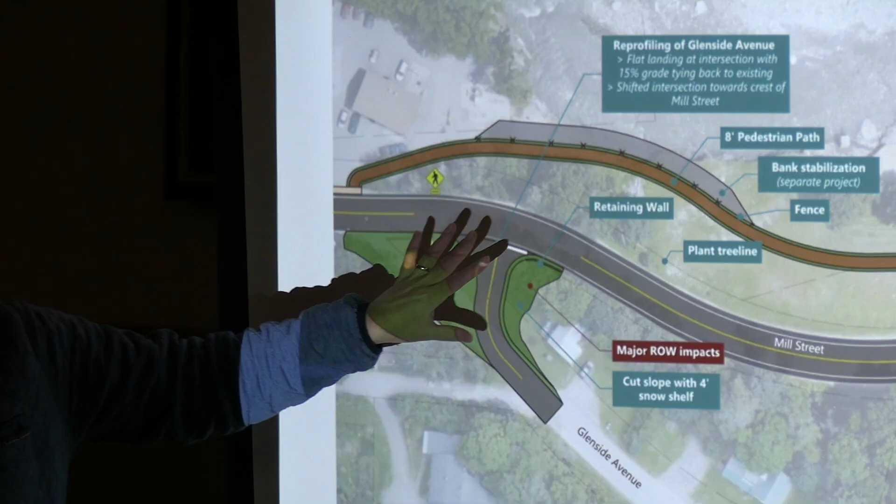And you'd be meeting essentially the crest of the hill that you sort of, as you're coming into town, you're coming over. It's a little hard to imagine that when you're looking down at it from above, but just to give you that idea, that crest of the hill is about at that location.

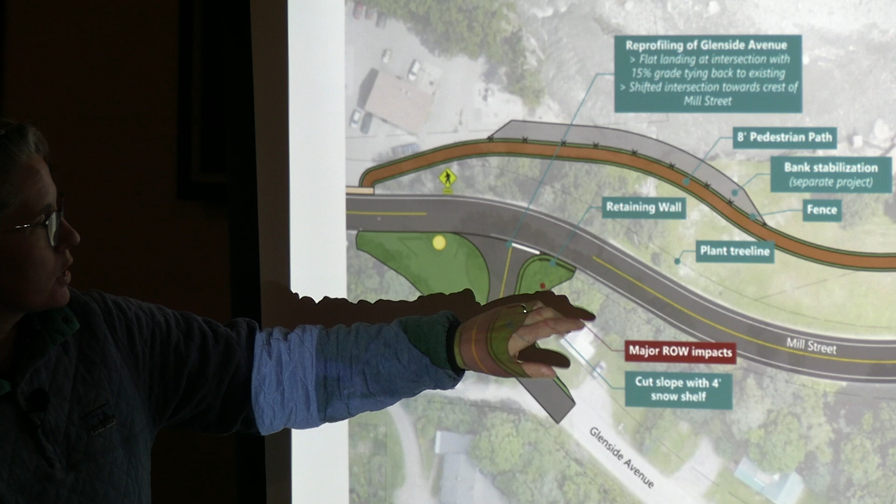So really reconfiguring and reconstructing a new connection and roadway through there to meet Glenside Avenue. And the other thing to be thinking about here is just that would require a retaining wall, and certainly would have right-of-way impacts to that parcel on the corner.

The other piece of this, I want to sort of shift to the north side. We really wanted to think through what a pedestrian path into the town-owned parcel would look like here.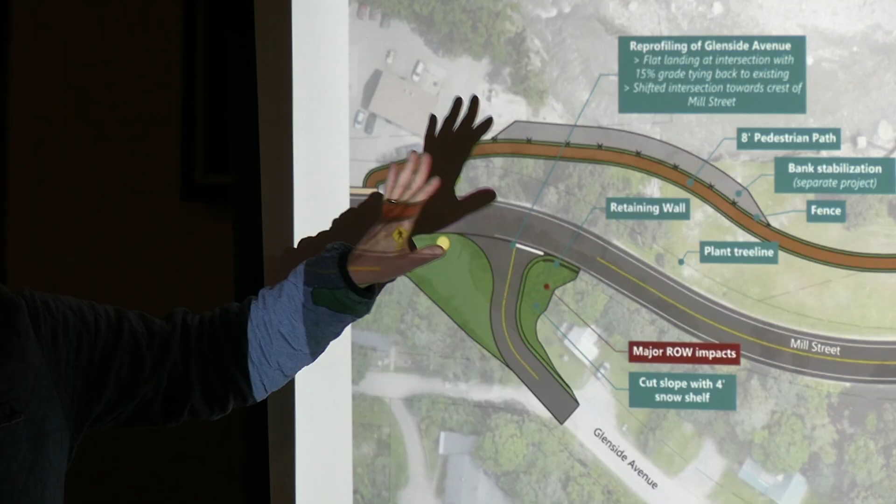Yet to be seen what the sort of bank stabilization project is going to bring. So in this design, we're really focused on the pedestrian path and some fencing to sort of harden against the bank that's pretty steep there for folks that would be using that space.

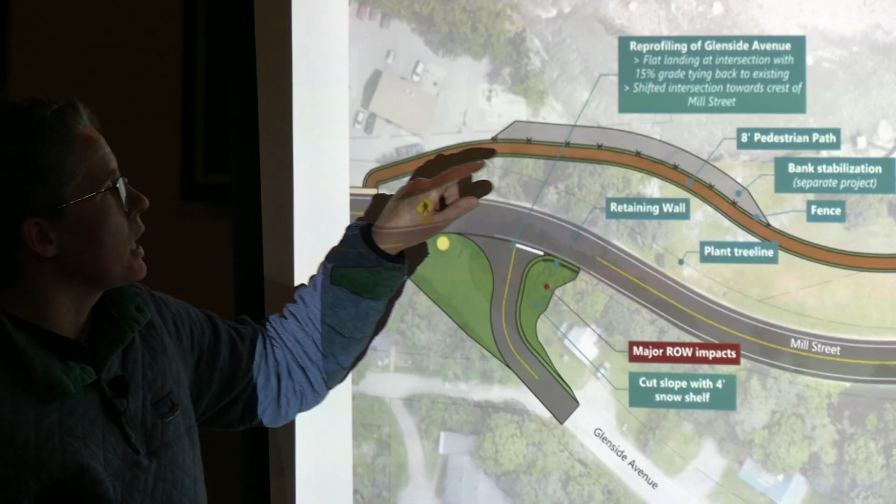But we were sort of relying on what comes out of the stabilization project to determine what sort of happens to the bank itself. But really thinking through just establishing that connectivity in terms of the pedestrian path and some of the elements that would go along with that.

And again, with this one, a big welcome sign to sort of set that tone, and planting a tree line along the parcel to, again, just sort of establish that it's a place that folks should start to slow down.

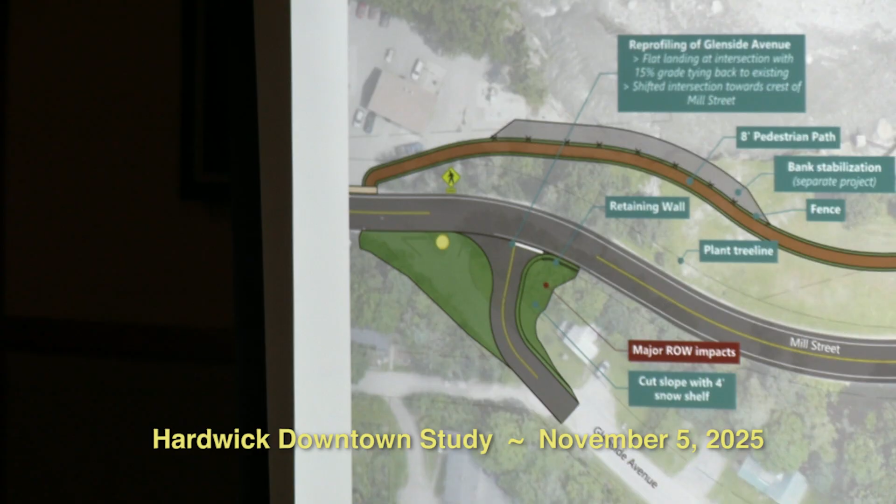So just to point out that anything that we design for here has to go through FEMA. It's similar to what Christine's saying about the post office has to weigh in. FEMA has to weigh in on whether or not it's allowed because they have provided the funds to purchase.

Yeah, and so for a lot of these menu options, a lot of the permitting is similar across them, but for some of those elements, like you said, approval from the post office, approval from FEMA, we've gotten familiar with what's allowed and not allowed on a FEMA buyback parcel, so contemplating some of those elements, but definitely something to keep in mind in terms of those approvals.

If you could go back, one question, since we're trying to signal you're coming into a village, and there's an intersection there, there's concern if people are still driving like it's a highway. Is there a reason the sidewalk couldn't continue on the north side as opposed to the pedestrian path? And that would be a visual signal that you're driving along and suddenly there's a sidewalk.

Is there room for it? So we did look at it as an option. It is tricky through there. It does fall off pretty quick. So we're already constrained. There is an existing wall on this side and certainly a steep slope.

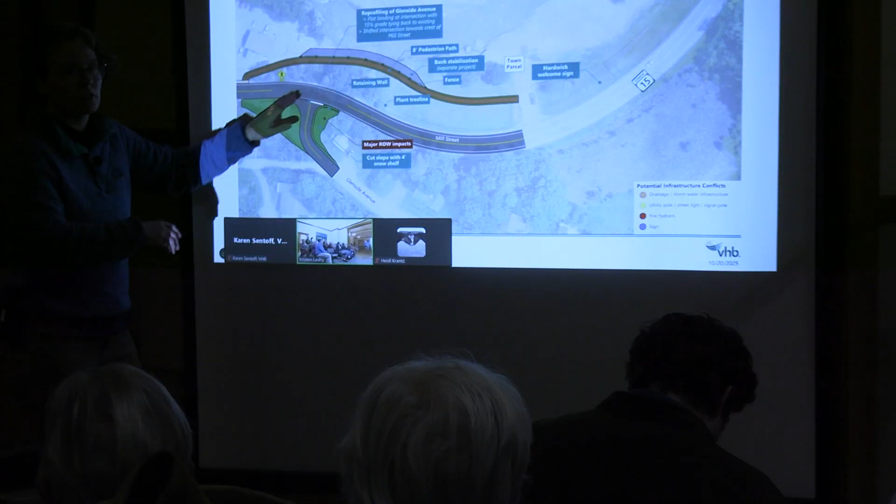Yeah, and one of the things that we contemplated with this option is instead trying to sort of meet that crest of the hill, because if we take it out, if you can sort of think about it again in your mind's eye, if we take out the crest of that hill, this part gets lower, which means Glenside gets even steeper to meet that point.

So this was sort of the balancing act of those two things by reconfiguring the sort of Glenside approach and creating sort of a flat landing there.

Over to the east, as it is, right, on this one? Yes, and this one we'd be higher. Shifting the intersection further puts it up east, higher then, as opposed to if you flattened it out. The low end is on if you went west. Yes.

Is there any talk about what the town parcel is going to be used for, or ideas on that? Flood storage. Okay, flood storage, riparian plantings, flood storage. Gotcha, I was just at the other meeting where we were talking about storing something there.

No, that's not where we're parking the trailer. Nope, we don't have the trailer there. We just might put green space there, a lot of water. Yeah, one day we'll put the trailer there and float it down the road.

Public access to the Lamoille, again zooming way in on the intersection with Mill Street and Main Street. Not a whole lot different on this one than alternative 2. Am I missing anything, Joe, on this one? It's very similar to alternative 2.

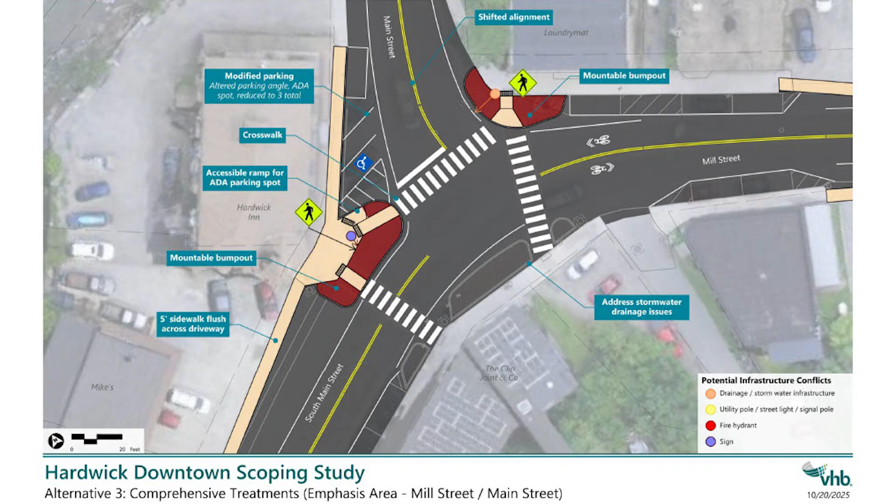This might have been discussed in a previous meeting, but what would be an alternative to move the crosswalk that crosses Main Street up, like closer towards the bridge? Can we not do that, or is there a reason why you couldn't push it back? So you're saying move the crosswalk up. This way you don't lose your parking spaces, and it's a much safer space up there to cross.

None of those crosswalks - I will say the choice for this location was based on actually sitting out there and watching what folks do, and folks cross right across that intersection without thinking twice about it. There were a number of vehicles that were not looking for someone crossing at that location. Do you think they will if there's a crosswalk? I don't think they will, but with some markings, signage, and certainly with the bulb-outs, I think it helps give that visual cue.

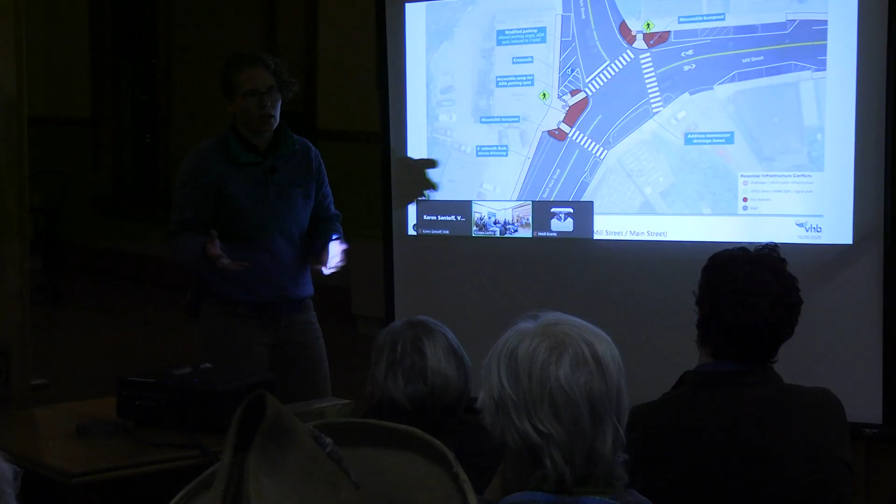I know some towns prefer red with white lines on both sides. There are all sorts of configurations, but from the engineering safety side, white markings are the ones that are most visible, so they show up to the driver most and build that awareness. So that tends to be our preference when we put designs together.

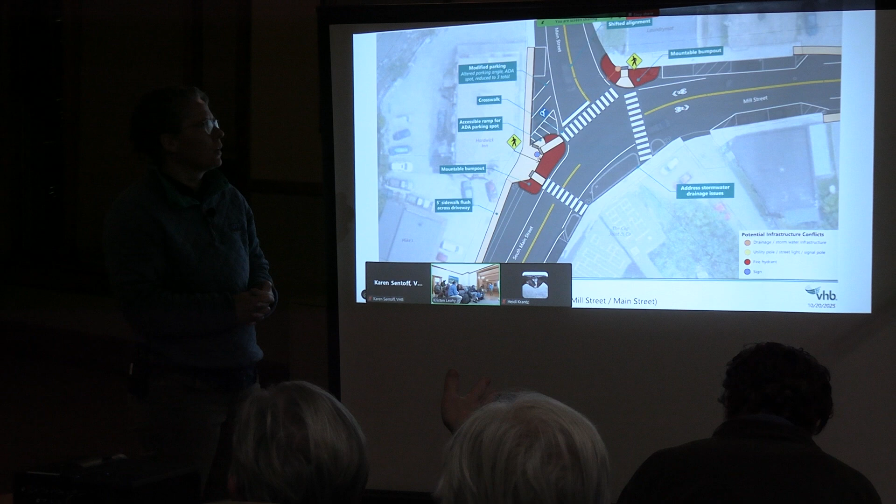We also talked about them being raised a little bit, which could slow people down, at least at those locations. We did have some internal discussions about raised components. I do think through your main corridor, raised components can be a little tricky. We had floated the idea of a raised intersection, but given some of the drainage challenges already present, it felt like a step too far, since it could cause bigger drainage issues.

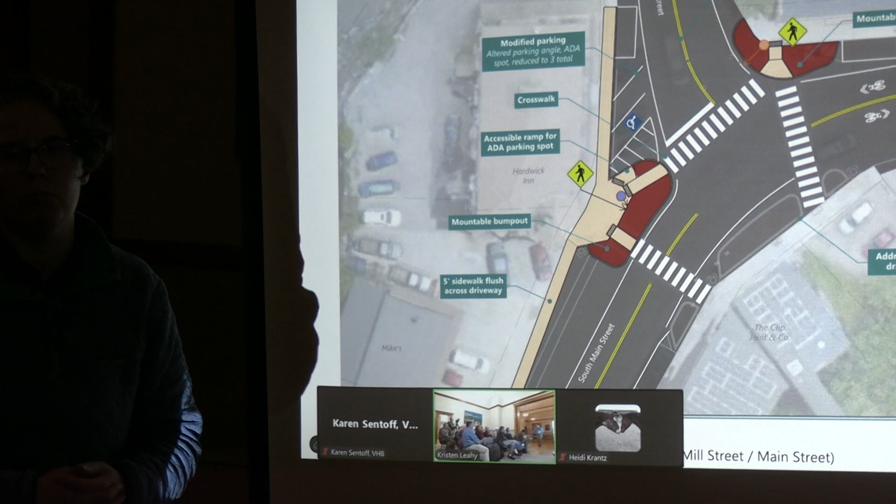We talked about doing it at the beginning of town when you're coming into it, which makes drivers automatically slow down, and then they'll continue that slower speed into town. I welcome the dialogue - if there's appetite for some of those, we call them in engineering vertical deflection elements, like speed bumps or speed humps, we can certainly explore that. But we hesitated to put that on the menu of options, having done this with enough communities.

I'm going to try to go in the order that I saw them come up. If I could bring the conversation back to Glenside for a second.

When you're driving down Glenside to turn left, by far the biggest issue is the speed of traffic barreling through from the east. I don't think anybody drives 25 - a lot of people drive 35. I can't time it, but I guess some people are at 40 by the time they get there.

So it's very difficult to safely turn left there. Two suggestions: once you get into town, right between Hayes Garage and the co-op, there's the flashing speed detection thing - I don't know what you call it. I realize that serves a purpose for traffic from that point on, but if that were at the start of Mill Street, it's just one element that might slow people down, because it's a huge problem. Plus that blinking light is next to the fire hydrant.

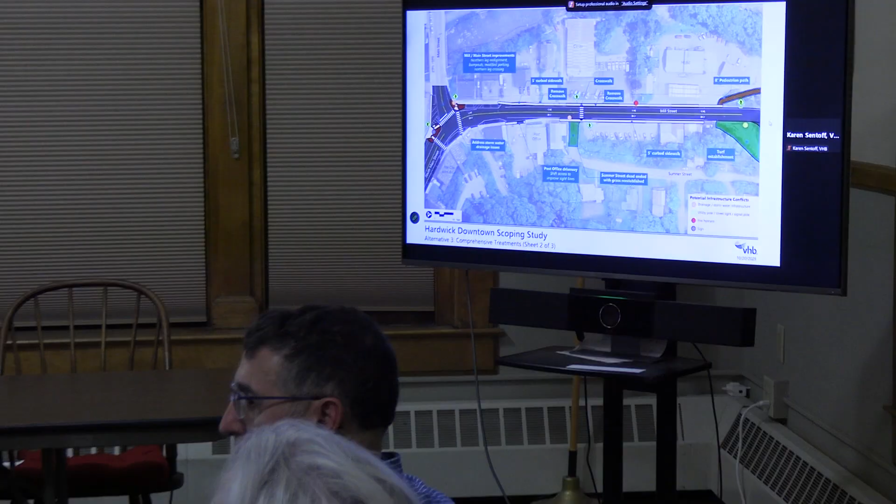Yeah, as I said, there is a whole science to that parking wayfinding thing. We have helped some communities with that, but I would look into exactly what we'd want to be pointing folks to and when. You have to really think about when you're capturing those folks and pointing them in the direction of parking that maybe isn't as obvious because there's a pedestrian bridge between the main drag and where that is. So you might want to be capturing folks right as they're coming into town from the west, as opposed to our core area here.

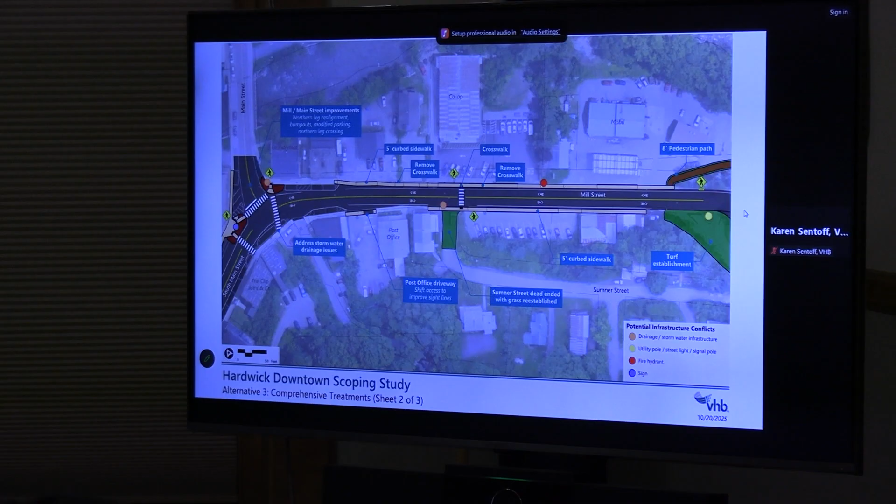But definitely a recommendation we can make, and we can pull in some pieces around what that could start to look like.

Tracy, this goes back to something Rob said, but I wasn't fast enough in the conversation elsewhere. The perennial puddle that Rob mentioned, that you always have to walk in the street to avoid, that's one of the things they would aim to address. So did you guys study that whole stretch for where things aren't draining properly? I'd love to understand exactly where, because we saw it after heavy rain, and we saw it again today. It would be helpful to understand the extents of that.

It's just from our truck traffic that causes it. When we repave, it's flat for a couple of months, then truck traffic compresses it in a line. Coming off the hill, or out of the parking lot, it just settles in that spot, and it becomes a long, 30-foot puddle.

And you can't get away from it because there's a concrete block that's the porch to 56 Mill Street. So there's no way around it, you have to duck away, duck into the garage, which is what I did today, to avoid getting splashed, because people are cruising down the road, and that's just the way it is.

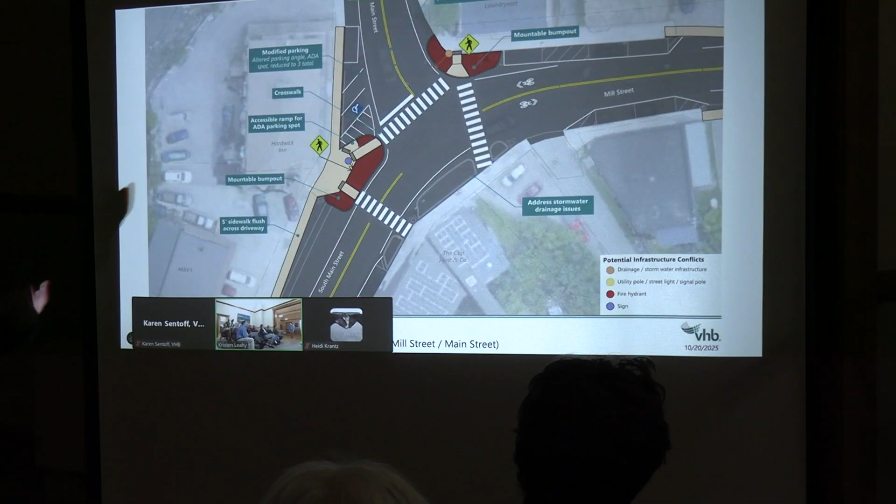That's really what we're thinking about when we zoom out and consider what configuration might work—taking up this space that currently people either drive through or that accumulates debris because no one drives in that spot. That's the visual cue we're looking at in terms of where is an appropriate place for that bump out.

All right, I am going to tick forward. There are just a couple of things, so part of our process is to look at... we looked at the detail of this, correct? Okay.

Part of our process is to look at an evaluation matrix, and this is our way of summarizing all of the different trade-offs and things we need to contemplate as we progress any one of these alternatives forward. We've done this by grouping the menu options in alternative 1, alternative 2, and alternative 3, and then looking holistically at what the impacts of those might be, as a way of consolidating that evaluation.

What this does is it helps to highlight some of those trade-offs and some of the things that we need to be thinking about as we progress the project and some of these improvements forward. So I'm just going to step through a couple of these. We don't need to go into detail, but it might help for some people to think about the different alternatives in this way. Thank you, guys.

In terms of engineering safety, this is all stuff you'll see in the report, but it's stuff we have to document as part of this process. The typical facility dimensions, we were just talking about those 11-foot lanes with the 2-foot shoulders. Again, really thinking about that striping and making sure that visual cue exists when it can, and then the curbed sidewalk.

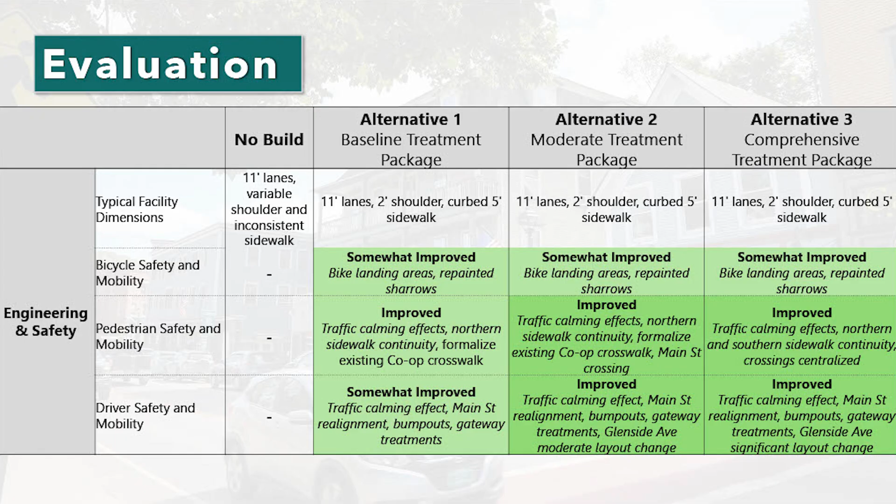In terms of impacts, stepping from left to right here, alternative 1, 2, and 3, just a couple of things that jump off the page. Certainly with changes to the Glenside intersection, we're talking about some right-of-way impacts, recognizing that there are some implications in terms of that component, especially when we get to alternative 2 and 3. Historic resources - it's a historic district.

There are some historic resources, and we have to have some keen awareness around those locations. If we're changing the sidewalk in front of a historic resource, we just have to have that awareness. And I think with most of those, it'd be what we call a de minimis finding - basically we're not having an impact that is going to change the nature and character of those historic resources.

So there is some potential for things we have to do in terms of permitting and getting through some of the permitting phases, but nothing that's jumping off the page at us as a constraint that we can't work through.

In terms of archaeological concerns, there is a sensitive area identified as part of the town-owned parcel to the east end of the project area. With that pedestrian path in alternative 3, there may be some additional steps we need to go through to clear that component of the work from an archaeological standpoint.

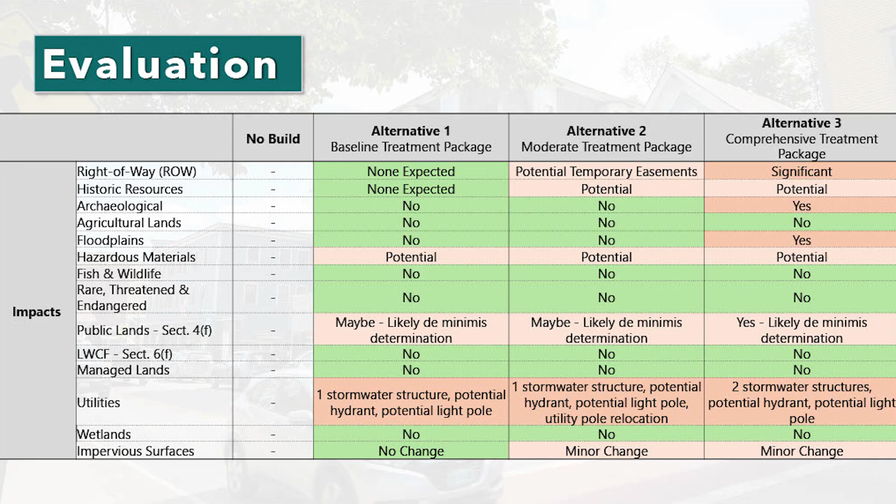These are all things we think about because for most of those impacts, there are additional steps in the next process that we need to be thinking about.

So anticipated costs, next item on the evaluation matrix. With the elements packaged into alternative 1, alternative 2, and alternative 3, that's how we get to this number. This is in today's dollars, and with many of our projects lately, especially with costs rising at the rate they are, what we'll end up doing toward the end of this process is coming up with a phased implementation plan.

It's our way of giving the community a blueprint, saying if it were us, here's what we recommend in terms of tackling one piece at a time. So we'll try to create that blueprint so that as you take this phased approach and implement these improvements, we'll also give recommendations about appropriate funding to go after so you meet the criteria for that funding, and we'll break it into parts.

So these are big numbers that have a lot of elements sandwiched into them, but we can also parse them apart and think about moving the radar speed feedback sign. That's probably not a big undertaking and could be done with town staff and resources. So that's something we could have as one of those very short-term improvements that could make a big impact.